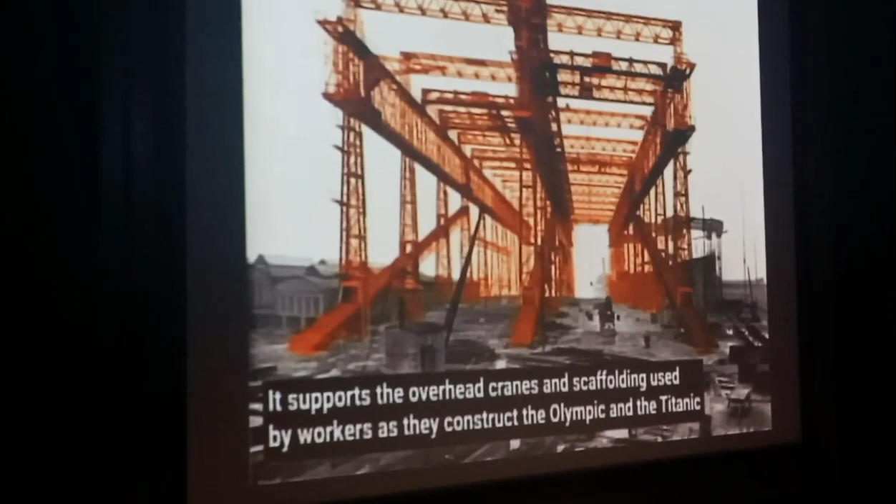Harland & Wolff Shipyard in Belfast, Ireland. This large framework, called a gantry, surrounds the ships as they are built. It supports the overhead cranes and scaffolding used by workers as they construct the Olympic and the Titanic. Notice that just beyond the far end of the gantry lies the Belfast Harbour.

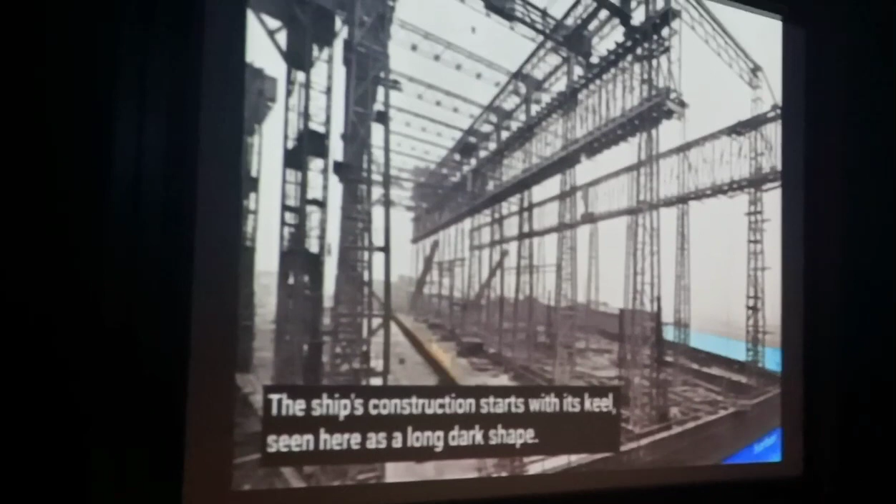Workers will build the Olympic here on the right, and then 9 months later, before the Olympic is finished, they will start on the left the Titanic. When completed, the Olympic stern, or rear end of the ship, will point toward the harbor. The ship's construction starts with its keel, seen here as a long, dark shape. The keel is the backbone of the ship that gives the ship rigidity.

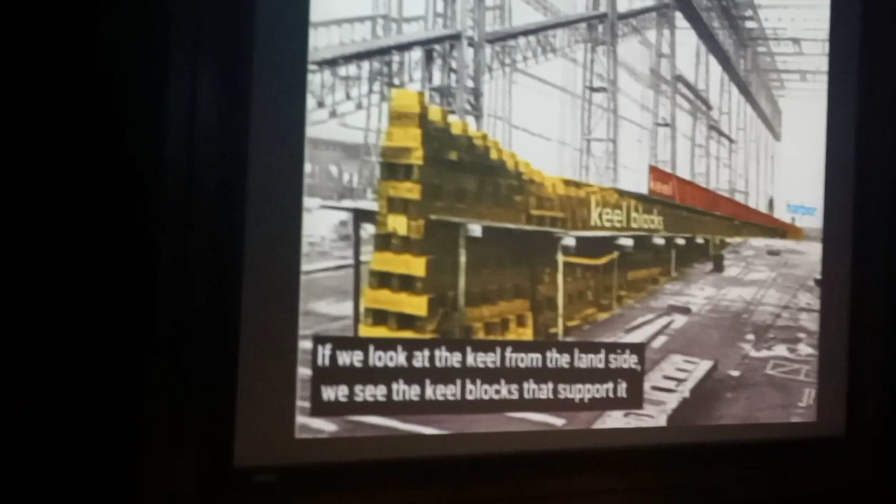If we look at the keel from the land side, we see the keel blocks that support it. These wooden blocks, typically pine, separate the ship from the slip, the concrete floor of the gantry. Each keel block stands about 5 feet high, so this creates a space under the ship for workers to construct the ship. Workers build the ship outward from the keel.

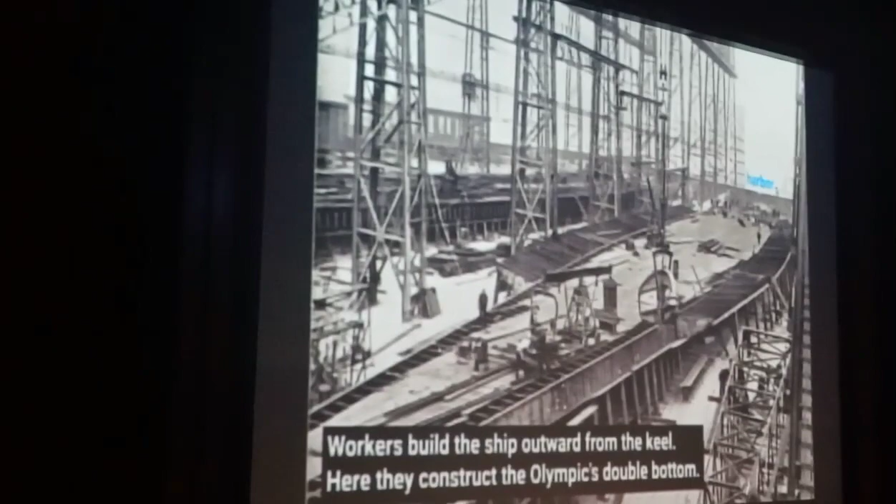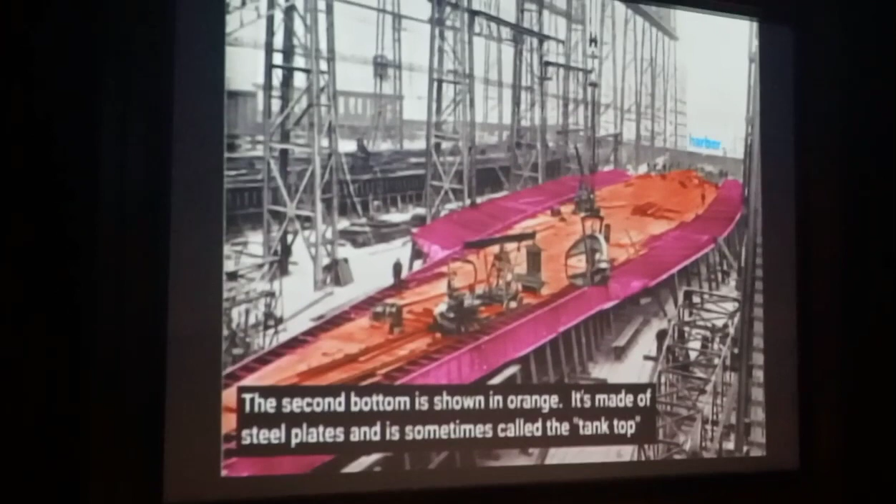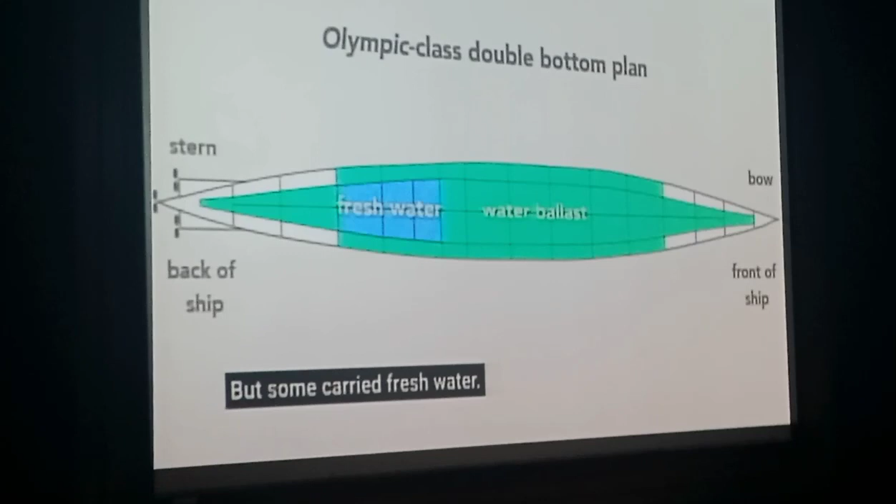Here they construct the Olympic's double bottom. In pink we see the framework that separates and supports the two bottoms of the ship. The second bottom is shown in orange. It's made of steel plates and is sometimes called the tank top because the double bottom contains 44 watertight tanks. Most of the tanks carried seawater used as ballast to balance and add weight to the ship, but some carried fresh water. In total, the double bottom carried over 5,000 tons of water, or about 1.5 million gallons.

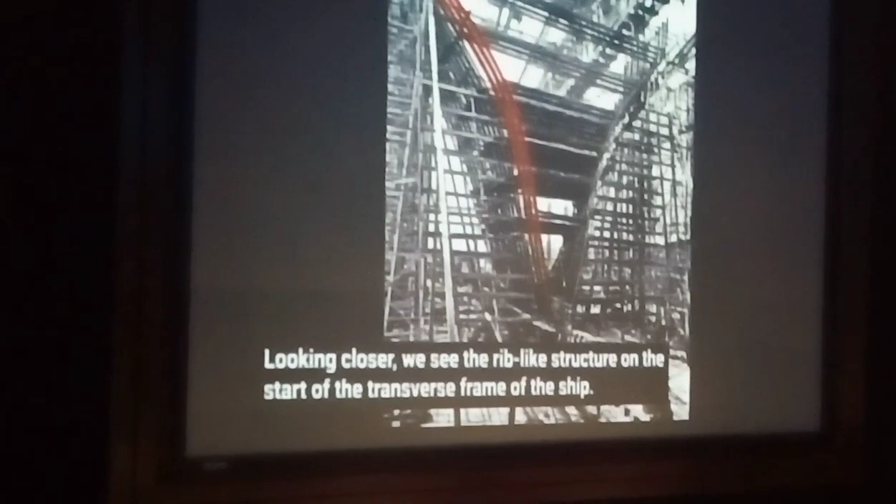Once they finish the double bottom, workers erect the framing for the hull. From this view, we see the framing for the stern of the ship. It's what a worker would see standing on the tank top and looking toward the aft of the ship. That's where the harbor is. Looking closer, we see the rib-like structure at the start of the transverse frame of the ship. Workers rivet to this frame the hull, which will form the skin.

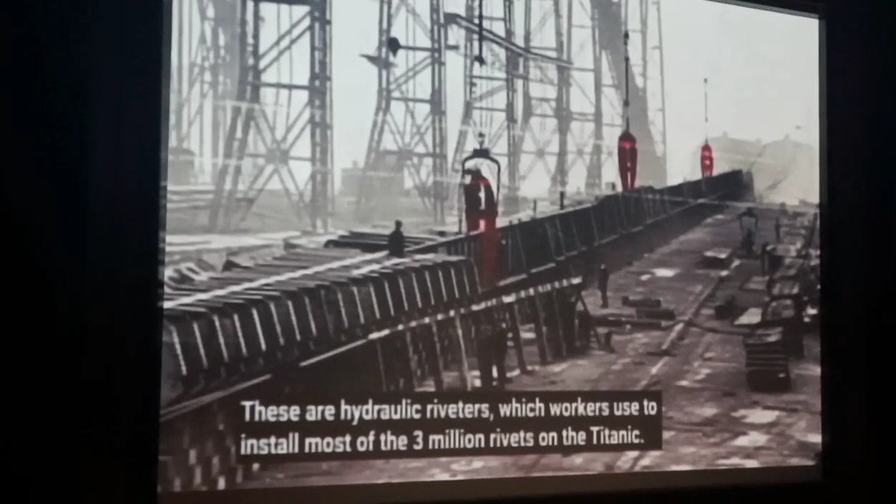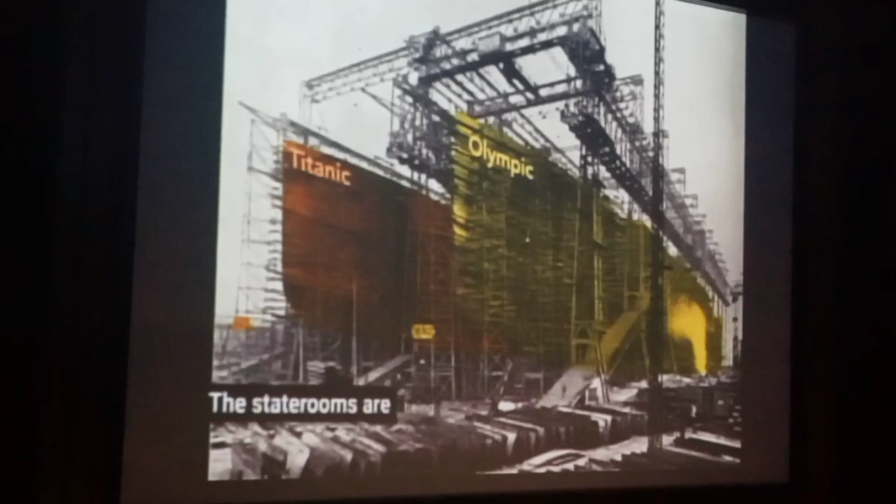Here we see the almost complete hulls of both the Olympic and Titanic. Work inside the Olympic progresses rapidly. The staterooms are being erected, and plumbing is being fitted throughout the ship. To prepare for the Olympic's launch, workers paint the ship a light gray so it will stand out in black and white photographs, although they repainted the ship black soon after its launch so that it matched previous White Star liners. To ease the slide into the water, the slip was greased with 23 tons of tallow, oil, and soap.

And then the order to release the ship was given, the hydraulic triggers were released, and the ship slid into the harbor, reaching a speed of 12.5 knots. Notice that the ship is launched backwards. There are many reasons for this, but among them is that the stern, the rear, is wider than the bow, so it is more buoyant. In a mere 62 seconds after launch, the Olympic was afloat.

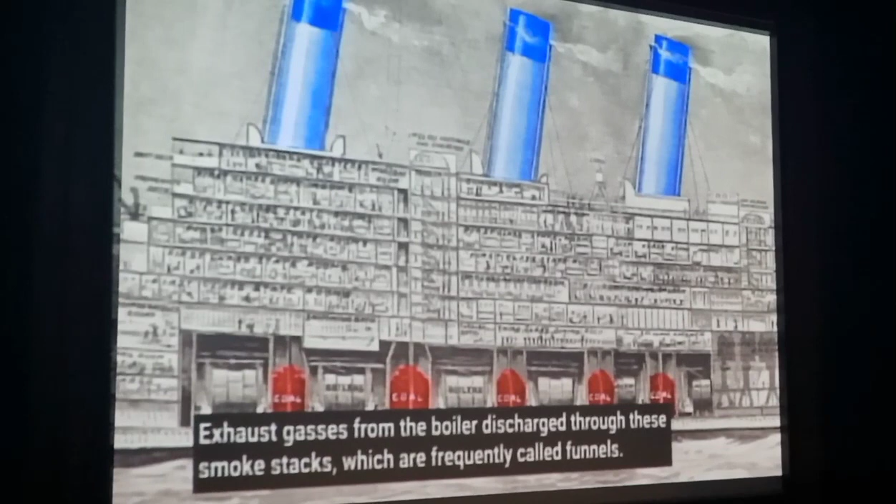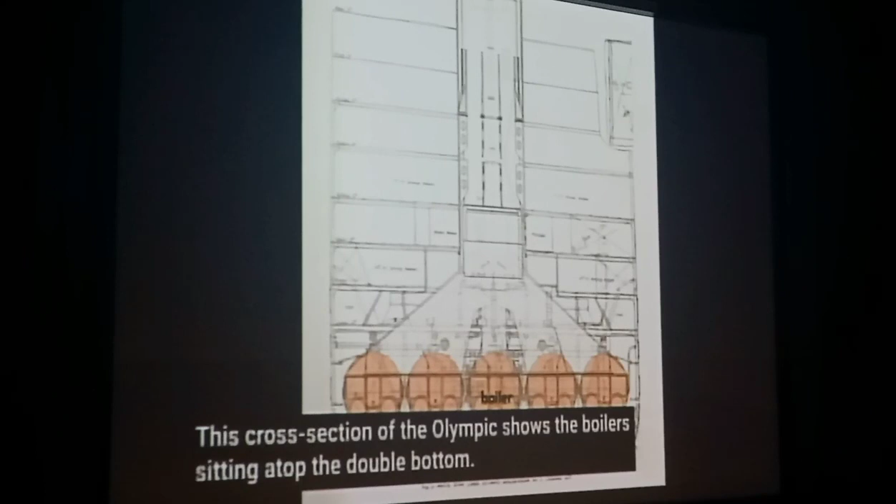The ship had 2 sets of reciprocating engines. These engines were fueled by coal, which was stored along the bottom of the ship. Exhaust gases from the boiler discharge through these smokestacks, which are frequently called funnels. Now, they don't look like funnels until you look at them the right way. They're upside-down funnels. This cross-section of the Olympic shows the boilers sitting atop the double bottom. Exhaust from the boilers is funneled up and out of the ship.

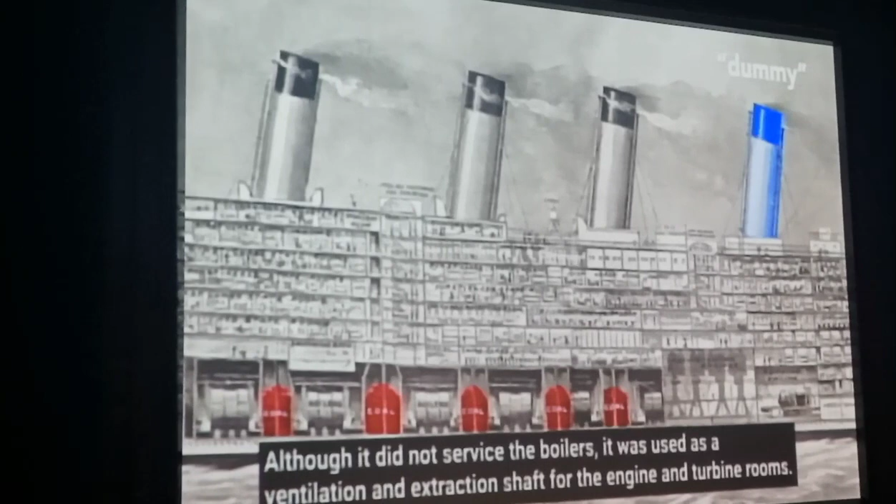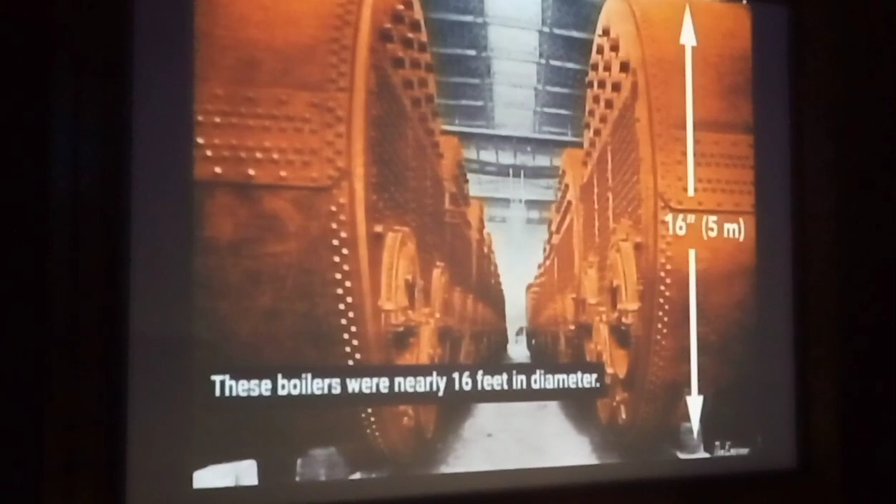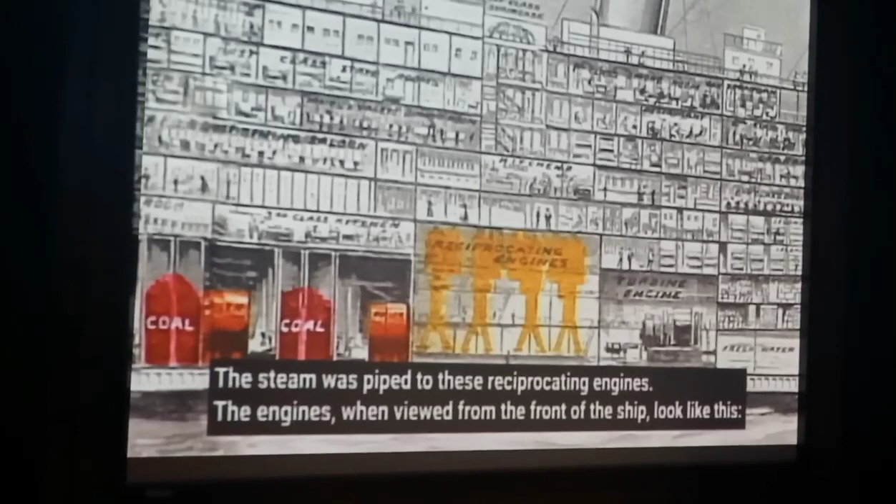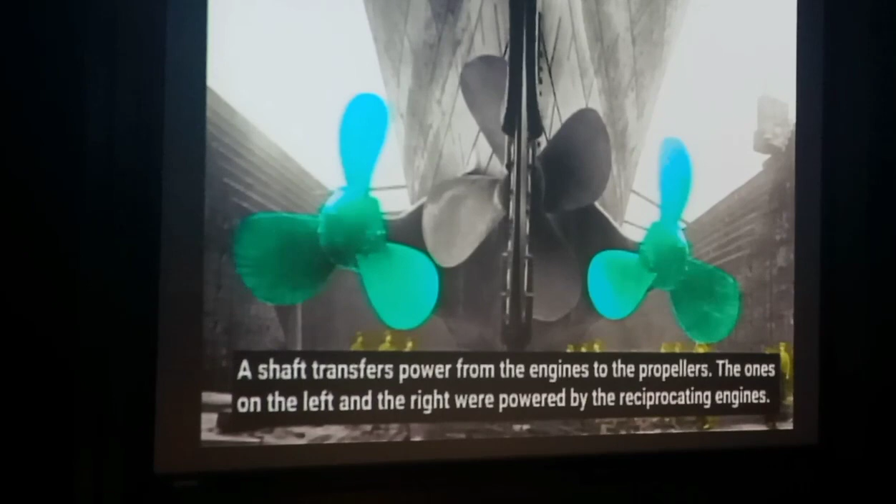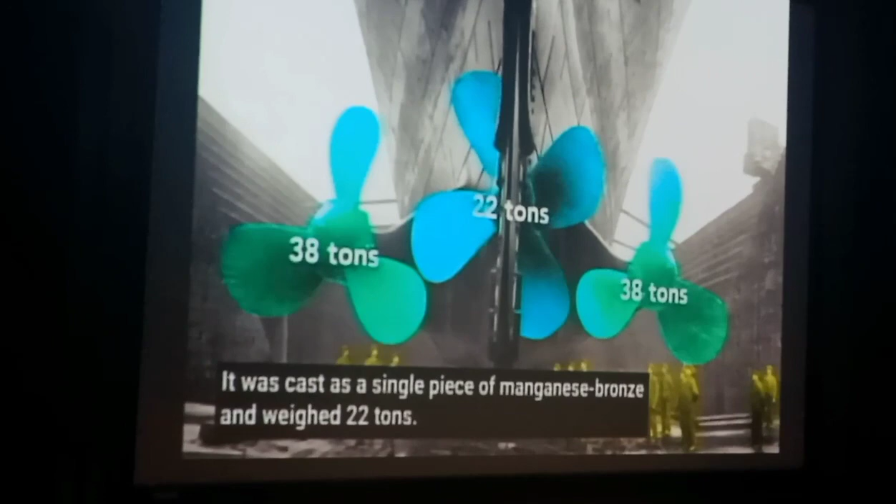The ones on the left and the right were powered by the reciprocating engines, and each propeller weighed 38 tons, while the central propeller was powered by the turbine engine. It was cast as a single piece of manganese bronze and weighed 22 tons. The outer propellers were used for tight navigation of harbors, while the central propeller was used only in open seas. Also, unlike the others, the central propeller could not be driven in reverse, only forward.

The Olympic-class ships were absolute marvels of engineering. I hope it's for their revolutionary design, rather than their failures, that they're remembered.